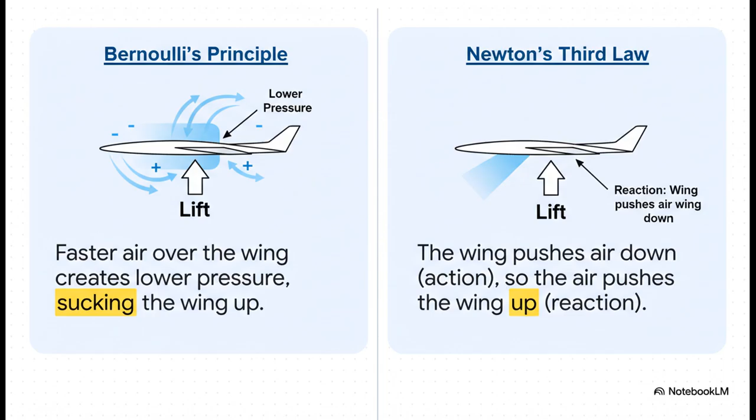Newton's camp, though, they're looking at it from the exact opposite perspective. What is the wing doing to the air? The wing is tilted, it's physically pushing air down. And for every action, there's an equal and opposite reaction. Push air down, and the air pushes the wing up. Simple as that. All right, before we go any deeper, we have to address the elephant in the classroom.

A lot of us were taught this thing called the equal transit time theory. You know the one, two little air particles split at the front of the wing and they just have to meet up at the back at the same time? Well, that's just not true. It's completely wrong. The air on top moves way, way faster than that theory would allow. So let's all just agree right now to toss that idea out the window so we can get to the real physics. So, if Bernoulli and Newton aren't fighting, how do they actually connect?

Well, to get that, we need to wrap our heads around a really fundamental idea. For our purposes, air is a fluid. That's right. The air you're breathing right now, to a physicist, it behaves just like water. It flows, it deforms, it follows all these elegant rules of fluid dynamics. And understanding that air acts like a super thin, invisible ocean is the key that unlocks this entire puzzle.

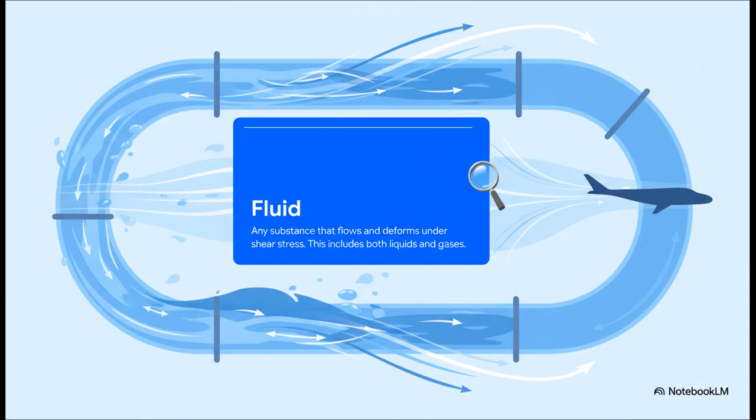And here it is, the big connection. You simply cannot have Bernoulli's pressure difference without also having Newton's downward deflection of air. They aren't just related, they are two effects of the exact same cause. They are, for all intents and purposes, mathematically handcuffed to each other. One cannot happen without the other.

But that still leaves a pretty big question, doesn't it? Why does the air follow the curve of the wing so perfectly? What's forcing it to behave in this magical, lift-generating way? Well, this is where we find the real secret ingredient. Something I like to think of as the no U-turn rule.

Now, the official fancy name for this is the Kutta condition, and really, it's just a simple observation about how the universe works. It says that when air flows off the sharp back edge of a wing, it has to leave smoothly.

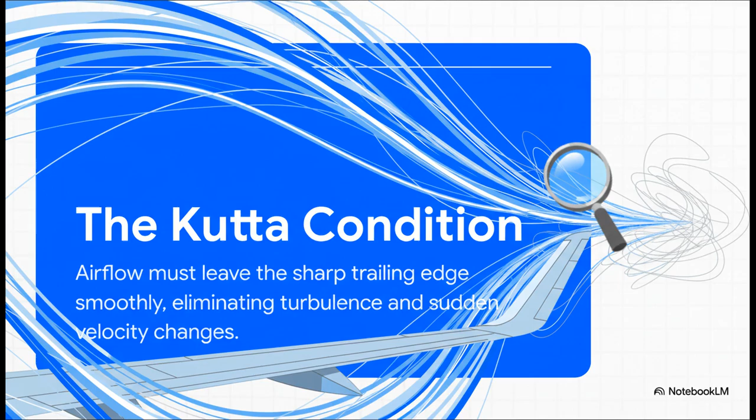It can't make a crazy, sharp U-turn. Nature just doesn't like that. Let's walk through this. So in theory, air could try to whip around the trailing edge of the wing in this physically impossible turn. But air has this tiny bit of stickiness, called viscosity, that just says, nope, can't do that. So nature has to find a workaround.

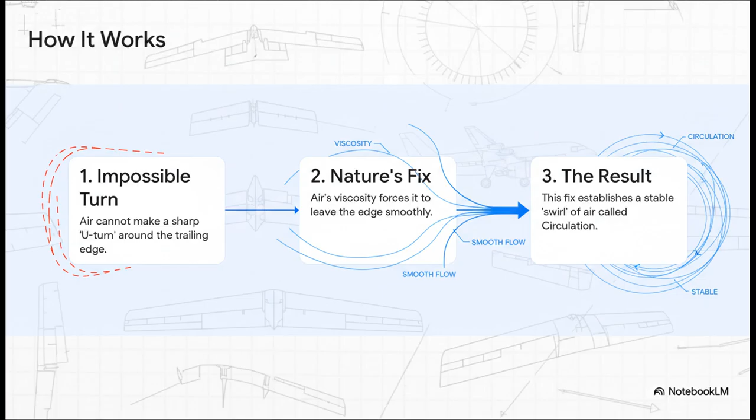It fixes the flow so that it leaves that edge nice and smooth. And the result of that fix? It creates this beautiful, stable swirl of air around the entire wing. We call that circulation. Okay, so we have all of our pieces on the table now. We have the Kutta condition, we have circulation, and we have our old friends Bernoulli and Newton. Now, let's put it all together and see the complete chain of events that makes an airplane fly.

And here it is, the whole cascade. It all starts with the Kutta condition, the enforcer. It demands that smooth flow. That demand creates the swirl, or circulation. That circulation is what makes the air go faster on top and slower on the bottom. And that's where Bernoulli steps in, turning that speed difference into a pressure difference.

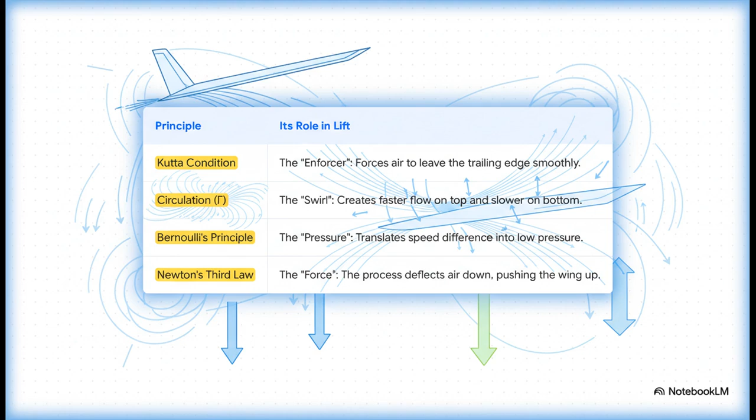And what's the overall result of that entire system? A massive amount of air gets deflected downwards, which gives us our big Newtonian push upwards. See? It's a perfect, logical domino effect. And get this, this isn't just some abstract idea, it's real hard math.

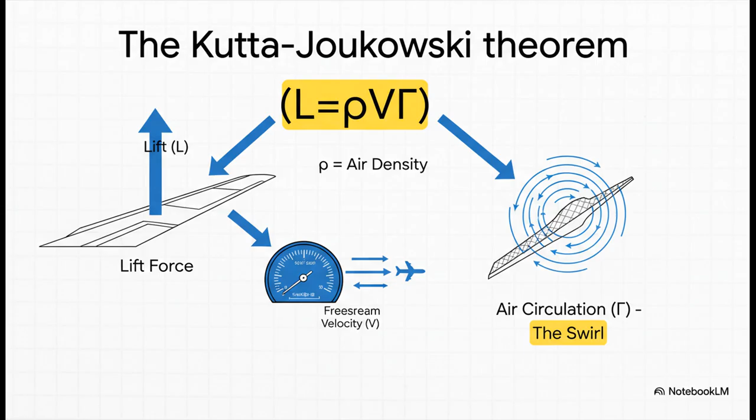The Kutta-Joukowski theorem is basically the golden equation of lift. It lets us calculate L, the lift force, by directly using gamma, which is the strength of that circulation. Engineers use this to predict with incredible accuracy exactly how much lift a wing will make. It's amazing. So we've pretty much cracked the code for how planes fly below the speed of sound.

But what happens when you decide to just throw all those elegant rules out the window and go faster than sound itself? Well, that's when a whole new world of physics kicks in. At subsonic speeds, the air gets a warning. Pressure waves travel ahead of the wing, kind of like saying, excuse me, coming through. But when you go supersonic, you're literally outrunning your own sound.

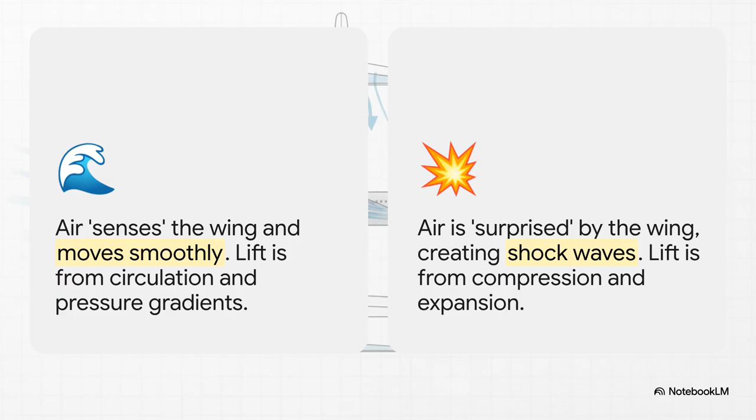The air has no idea you're coming. It gets slammed, totally surprised, creating these incredibly powerful shock waves. Lift is no longer about smooth, elegant flow. It's about brute force and violent compression. And this changes absolutely everything about how you design a plane.

Wings now need razor-sharp edges, basically to pierce the air. The point where lift is focused, the center of pressure, jumps backward dramatically. That's a really dangerous thing called Mach tuck. The whole game changes from trying to coax the air smoothly to just managing these violent shock waves.

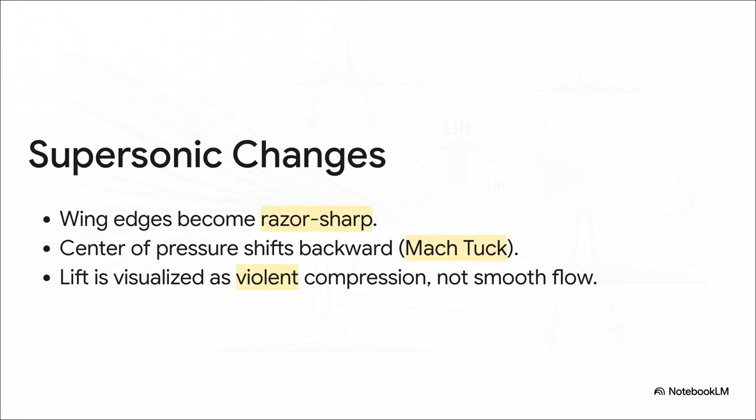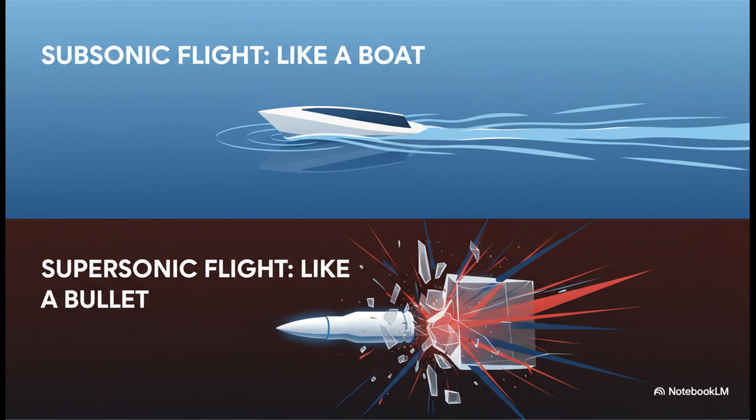This analogy here just says it all, doesn't it? Flying subsonic is like a boat gliding through water, creating these gentle, smooth ripples. Flying supersonic is like a bullet smashing through a sheet of glass. The air doesn't flow, it shatters. It's physics by impact, not by persuasion.

So the great debate between Bernoulli and Newton, well, it was never really a debate at all. They were just two parts of a single beautiful and complete picture, all held together by nature's simple rule against making U-turns. We've seen how that all falls apart at supersonic speeds.

So the question I want to leave you with is this. As we push even further into the hypersonic realm, we're talking 5–10 times the speed of sound, what new rules are we going to discover? And how will everything we know today have to change to meet that next challenge?